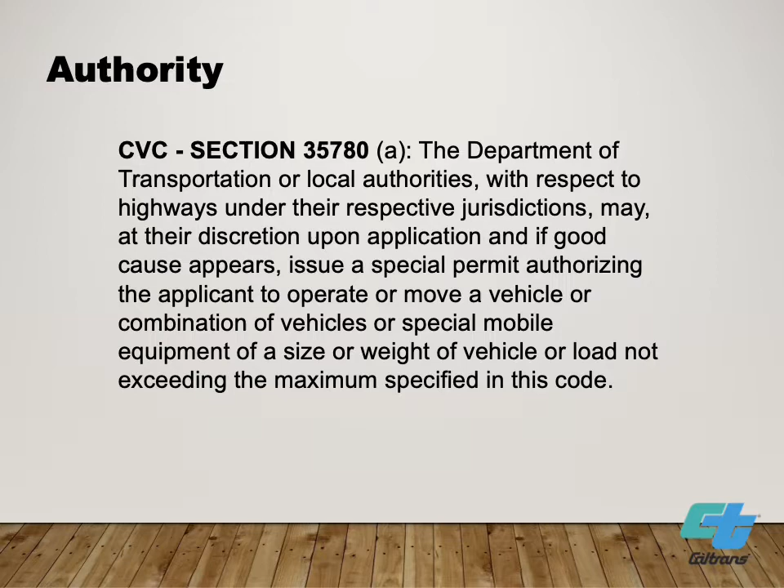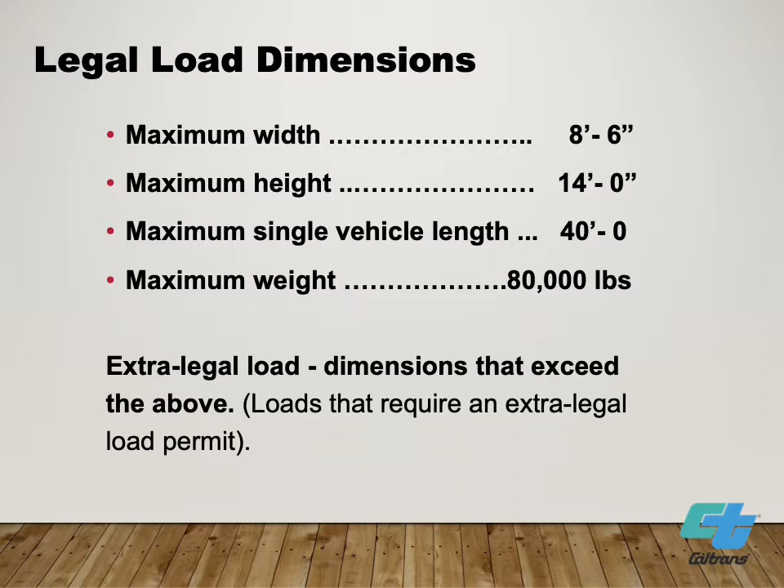To understand what is considered an oversized overweight permit load, we need to know legal dimensions. Legal vehicles are a maximum width of 8.5 feet, maximum height of 14 feet, maximum single vehicle length of 40 feet, and a maximum weight of 80,000 pounds. Any vehicles or loads beyond the legal dimensions or heavier than 80,000 pounds are considered to be oversized or overweight and require a transportation permit to travel on the state highway system.

Here are some examples of permit loads. Here is a 9-axle trailer with a Cat Scraper 657E. This is considered an oversized and overweight permit load.

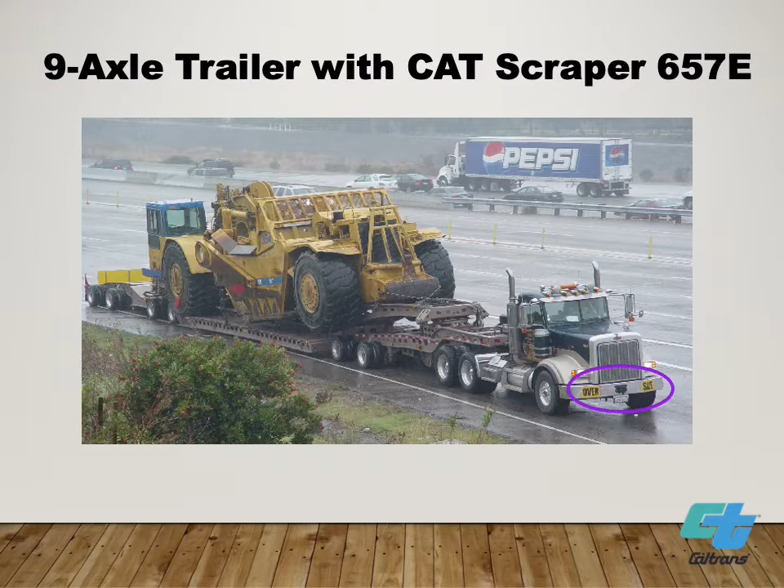Here is a windmill blade that can reach lengths of up to 150 feet long.

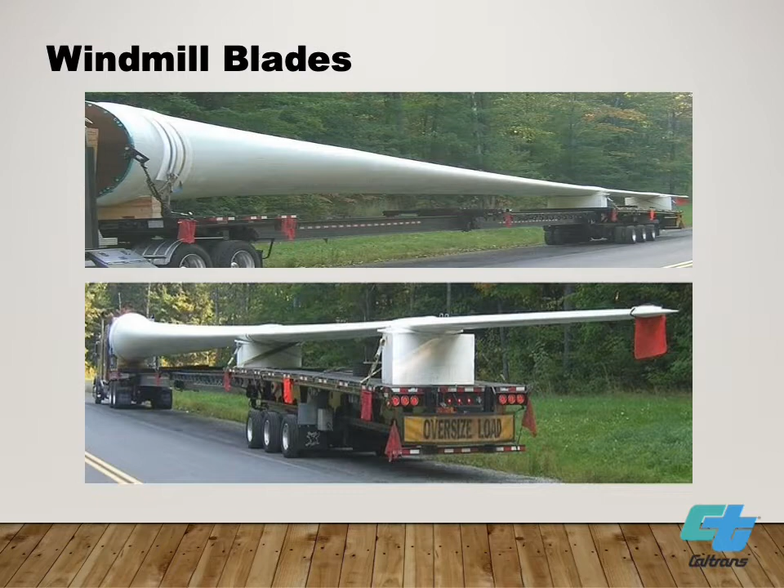Here is a refinery tank, which was an oversized and overweight permit. Sometimes a permit load requires the removal or resetting of traffic lights and electrical poles while moving the load.

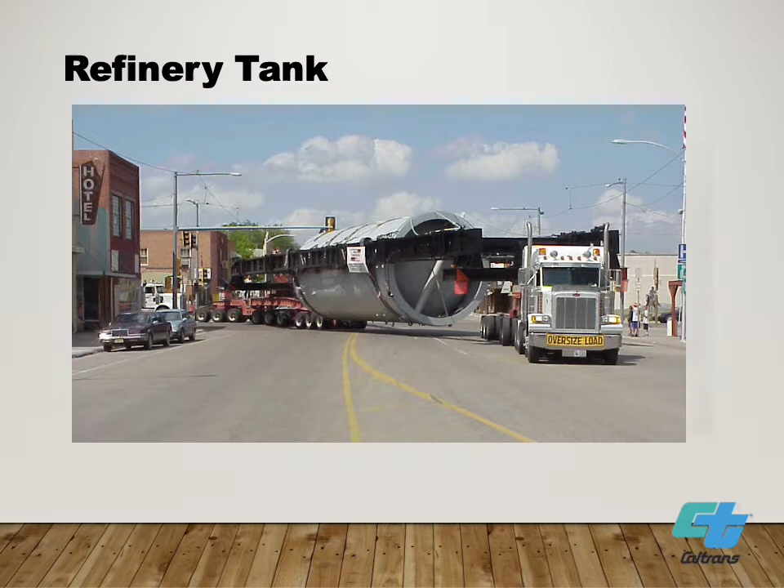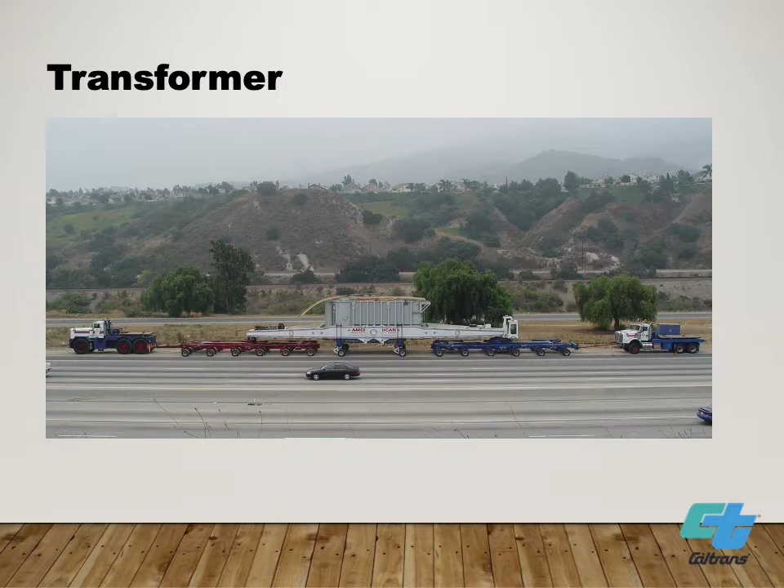Lastly, here's a transformer. Since it was too heavy, it was hauled on dual-lane steerable trailers to distribute the load on each axle and to avoid damage on roadway pavement.

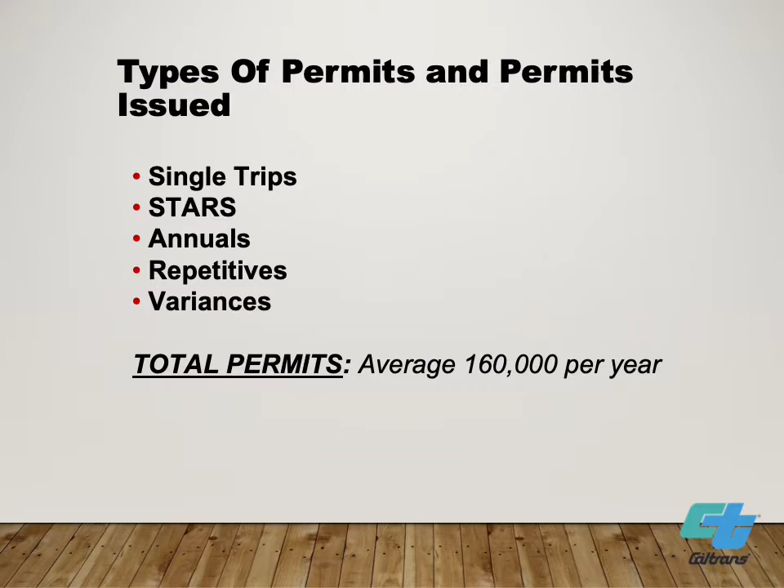These are all the types of permits our office is authorized to issue: single trips, STARS, annuals, repetitives, and variances. The Transportation Permits Office averages about 160,000 permits per year.

A single trip or STARS permit is a permit issued for an oversized overweight permit load that is good for one-time, one-way travel from point A to point B. The only difference between the two is that single trips have to be faxed in, while STARS can be processed online using our STARS program.

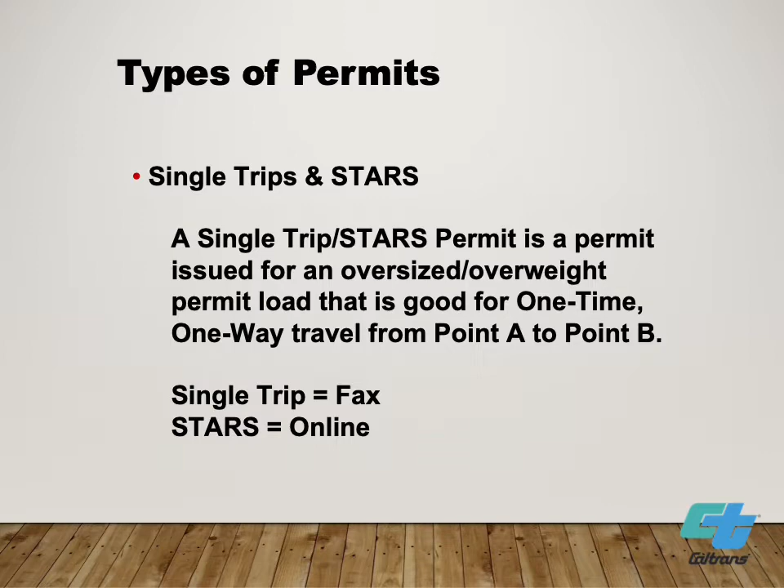An annual permit is a permit issued for a qualifying vehicle or load that is valid for 1 calendar year and limited to legal height, a max width of 12 feet, and is allowed to have extra legal weight. Being that they are only allowed certain dimensions, they are allowed to travel throughout the state based off of a map they are given on highways that can accommodate them safely.

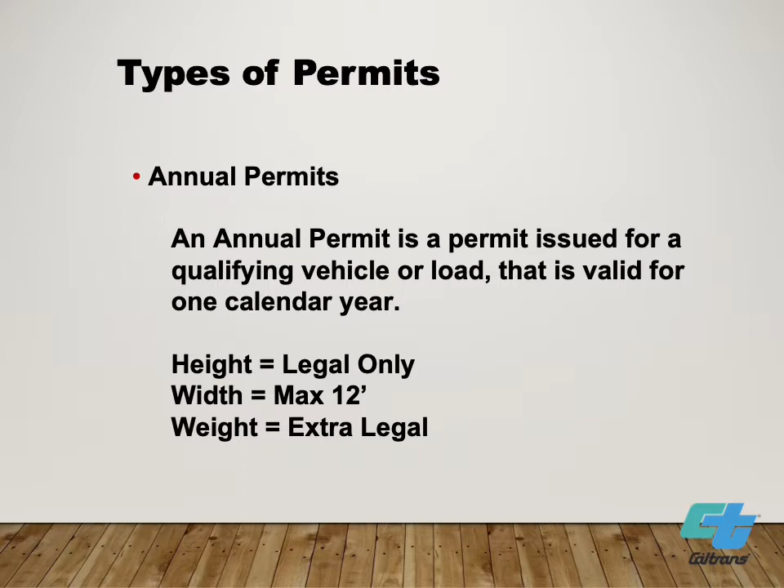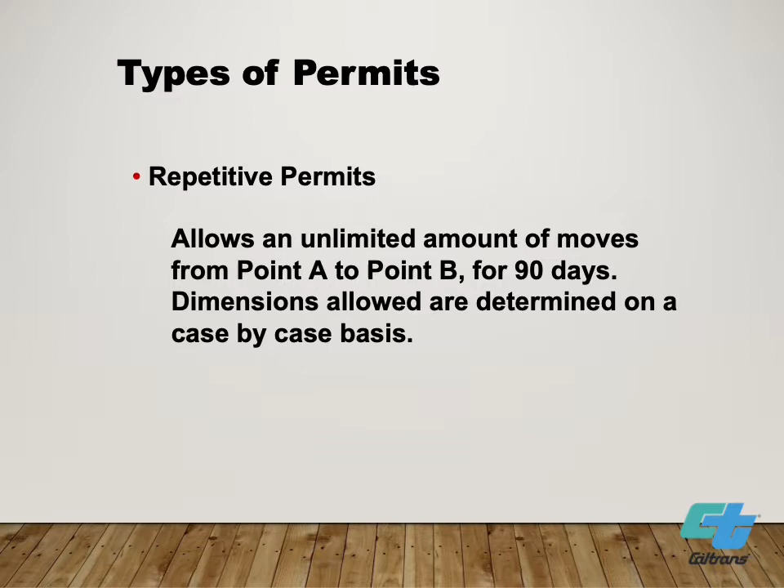A repetitive permit is a permit issued that allows an unlimited amount of moves from point A to point B for 90 days. Unlike an annual permit, dimensions allowed are determined on a case-by-case basis.

Lastly, there are variance permits. These are for large loads taller than 17 feet tall, wider than 16 feet wide, and or longer than 125 feet. This permit type may require CHP to safely escort the load and may require the route to be surveyed by a third party before the permit can be issued.

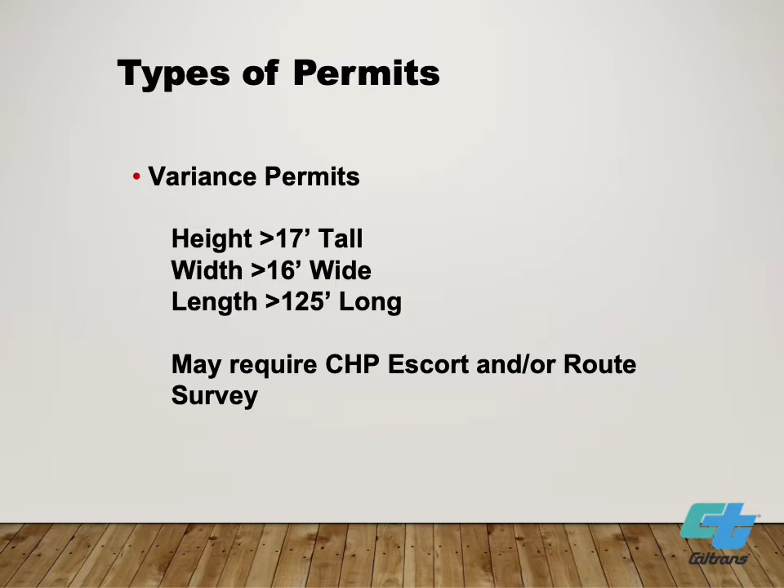When we issue any permit that is not an annual permit, we provide the specific route from point A to point B. Based on the size of the vehicle or load, we provide a safe and short route using our route clearing database to try and avoid any construction or restrictions on the state highway system.

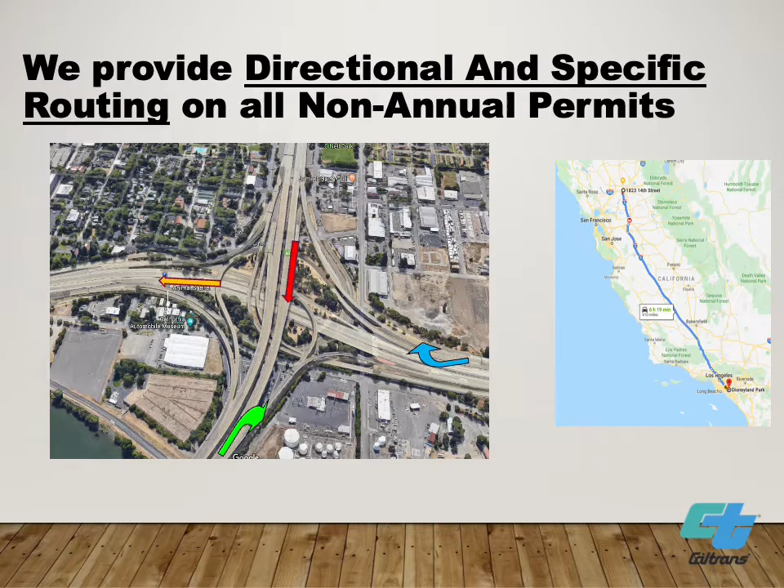Since these routes have been checked to ensure they can accommodate the oversized loads, haulers are not allowed to deviate from their given route, nor take a detour not listed on their transportation permit.

Here is an example of a single trip permit. When we issue a permit, the information can be valid up to 10 days from the date of issue. Since the permits are issued based on conditions at the time of issuance and are valid up to 10 days, these oversized and overweight loads must be allowed to travel through or clear through construction areas prior to any new installation of restrictions.

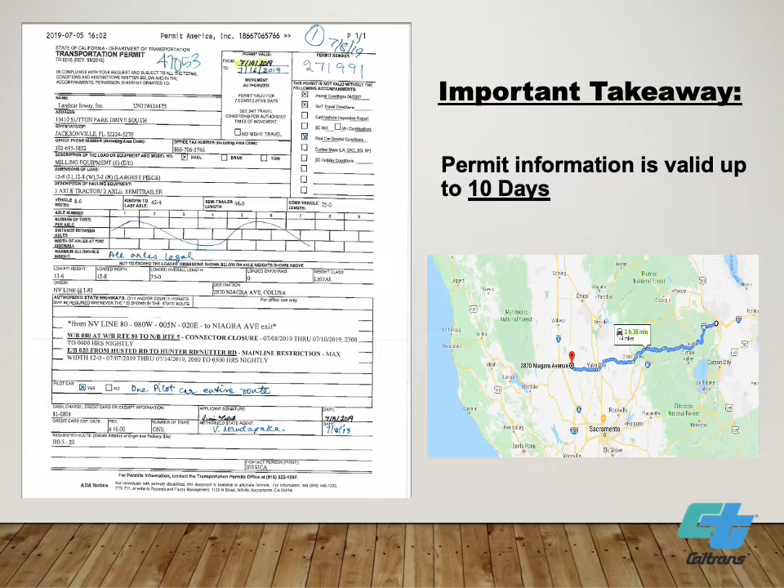If we take a look at the route on this permit, you can see that the route includes the location, date, and times of closures or restrictions that they will encounter on their route. This gives the hauler an opportunity to avoid traveling at those times. These are generated based off of the information you submit.

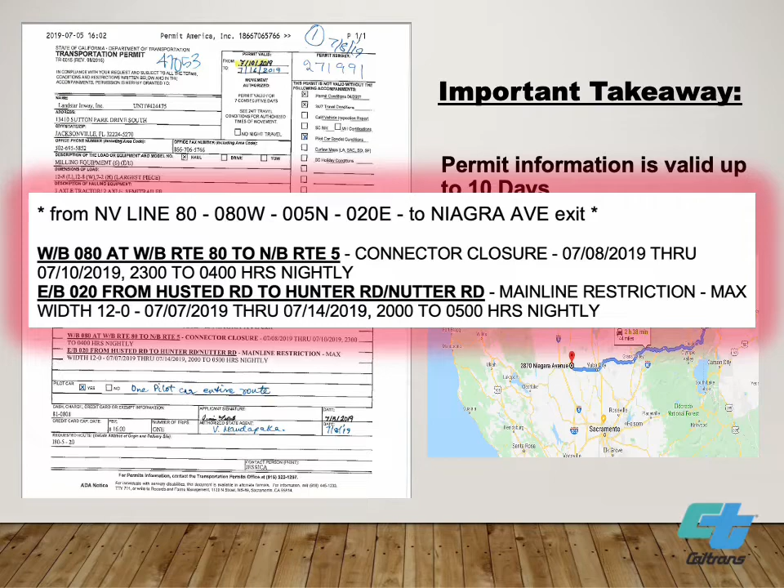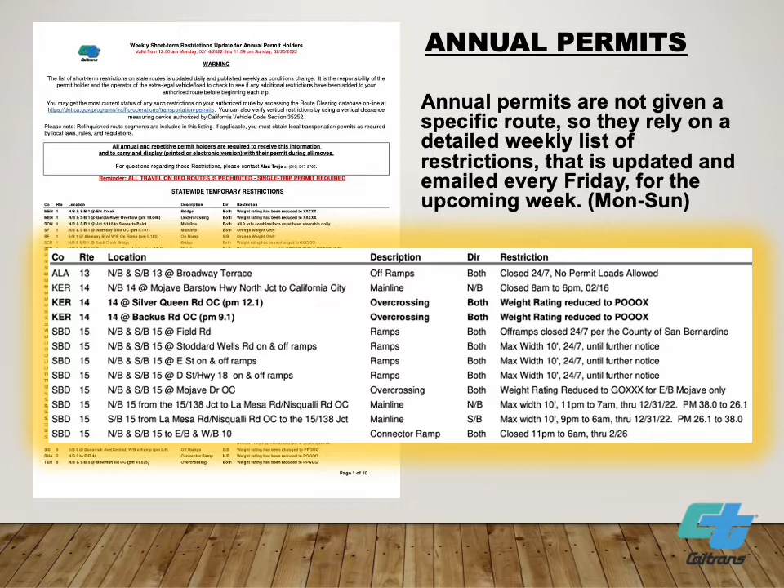Annual permits, on the other hand, are not given a specific route, and since they only receive a permit once a year, they rely on a detailed weekly list of restrictions that is updated and emailed to them every Friday for the upcoming week. This list is compiled using the information we receive from you as well.

According to the department's construction manual, section 4-1203C 1A, the RE is required to confirm that the contractor submits a scheduled closure in advance as outlined in the standard specifications, and that the RE must inform the transportation permits unit at least 15 days in advance of the closure. Any construction restrictions will impact the movement of permit loads on the state highway.

This is why we need to know all the construction restrictions in advance in order to update our database before we issue out any permits to our customers.

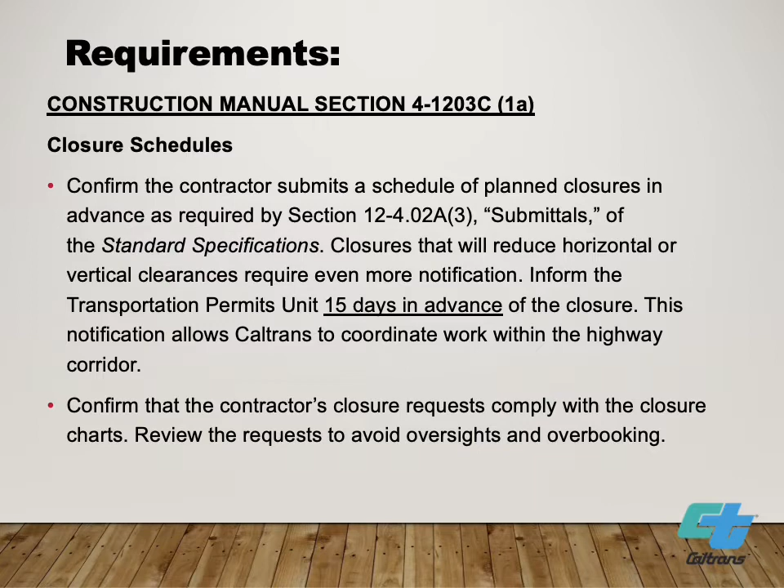In order to accomplish this, all closures must be submitted at least 15 days in advance through LCS. In addition to submitting the closure into LCS, a notice of change in clearance form will need to be submitted for the following closure types.

1. Any reduction of horizontal clearances of travelways, including shoulders, to 2 lanes or fewer during construction. This can include construction activities such as temporary barrier placement, paving, and one-way traffic control.

2. Any reduction on vertical clearances of travelways, including shoulders, during construction. It could be activities such as pavement overlays, overhead sign installation, or falsework girder erection. And 3. Any permanent changes in vertical or horizontal clearances.

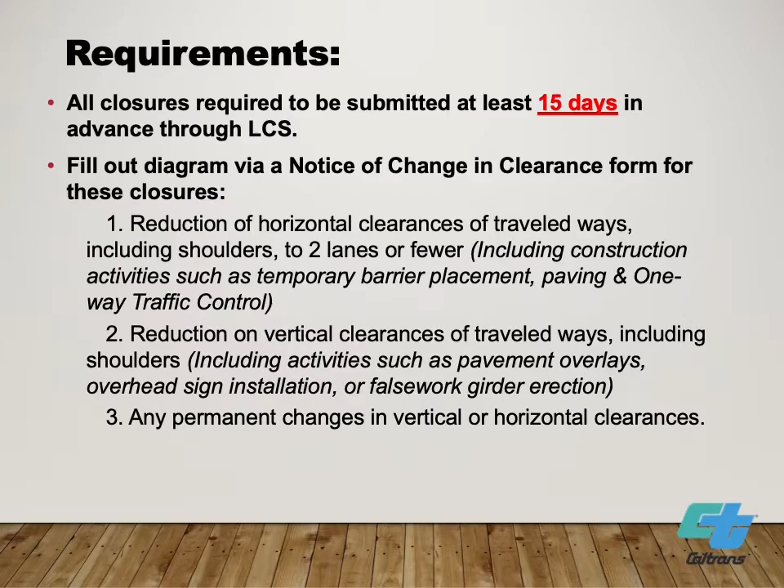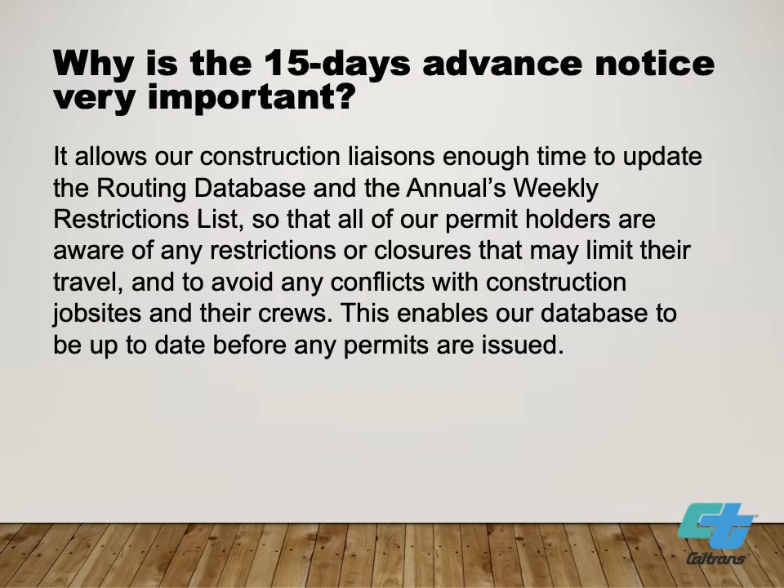Why is the 15 days advance notice very important? It allows our construction liaisons enough time to update the routing database and the annual's weekly restrictions list, so that all of our permit holders are aware of any restrictions or closures that may limit their travel, and to avoid any conflicts with construction job sites and their crews. This enables our database to be up to date before any permits are issued.

In the situation where a closure request is submitted by the contractor, the resident engineer is required to accept the submittal in the lane closure system. Otherwise, the closure will not post and be visible in the LCS, and the HQ construction liaison staff will not see the closure request.

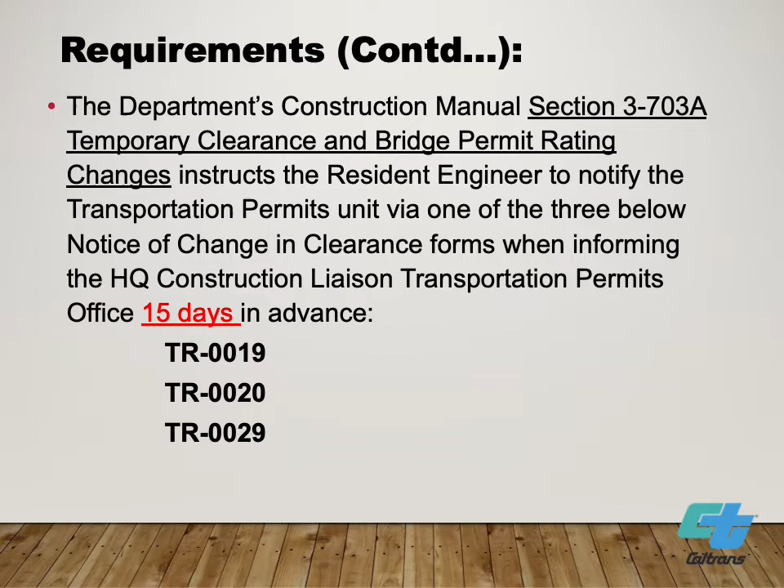When the resident engineer is required to notify HQ Transportation Permits Office of any changes in vertical or horizontal clearances with a clearance diagram, the RE will need to fill out one of the 3 Notice of Change in Clearance forms: TR-0019, TR-0020, or TR-0029 for every closure. According to the Construction Manual Section 3-703A, this must be done at least 15 days in advance of the change.

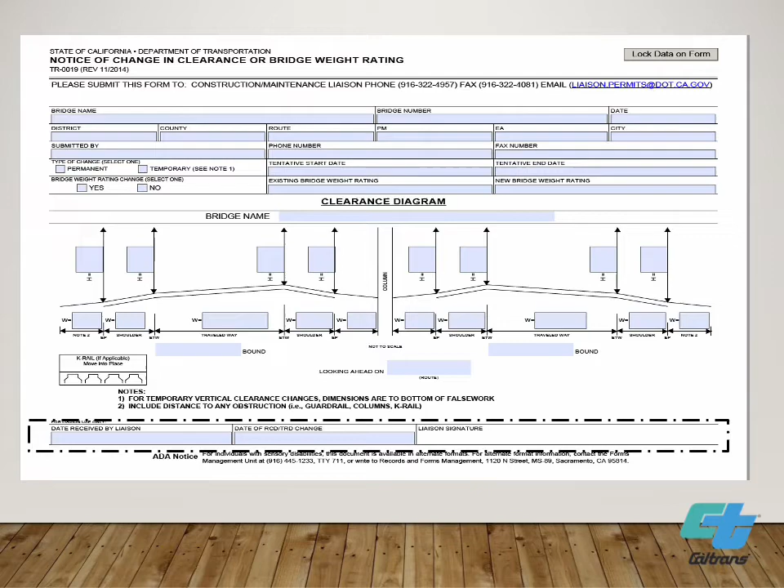Here is Form TR-0019. This form is used for divided highways, where there is a separation between both directions of the highway. The RE will need to fill out all the required information at the top of the form, including the tentative start and end date of the clearance change. The bottom portion of the form must include all the required measurements, listed in feet and inches. If K-rail barrier is being placed, please draw in the location of the K-rail. Measurements between K-rails should be measured from the inside face of the barrier.

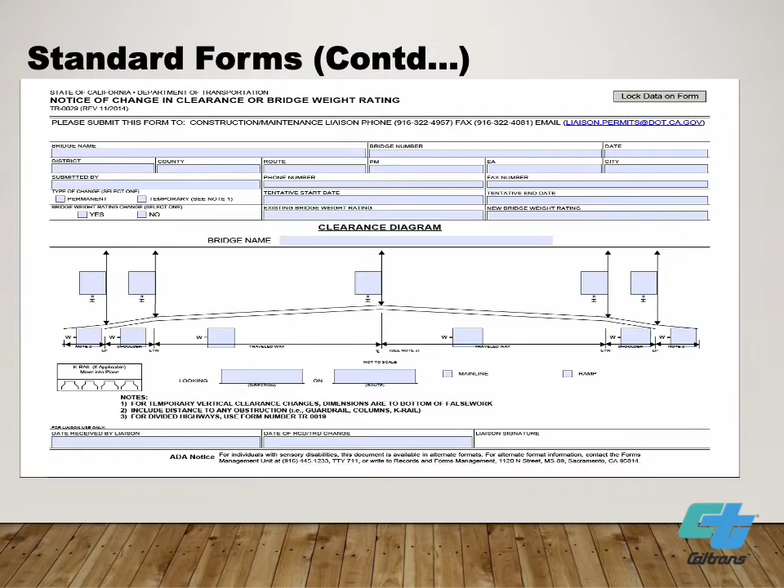The next form is TR-0029. This form is similar to Form TR-0019, but is used for undivided highways. This form can also be used for on and off ramps as well.

This third form is TR-0020, and this form is used for overhead signs. Although this form looks like it is for a single post type sign, you can use it for two post signs as well. Just be sure to include that information in the sign name portion of the form.

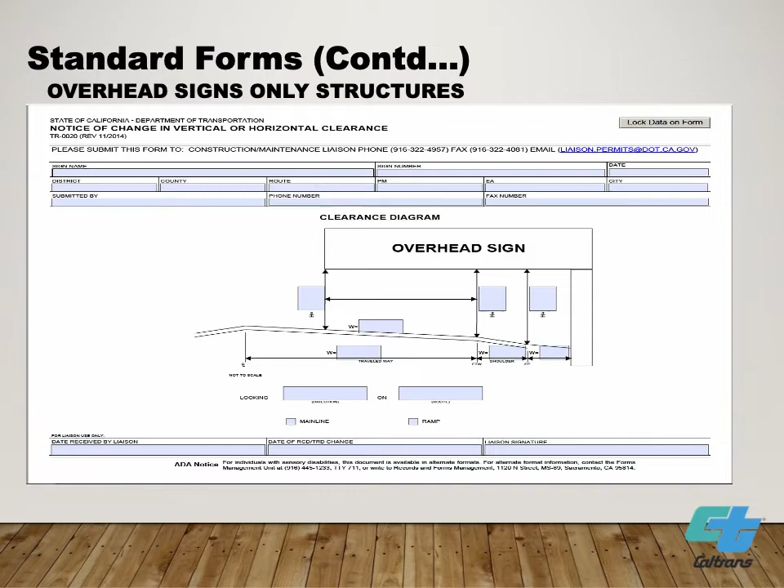After you have completed your change in clearance form, please send a copy to our construction liaison staff at liaison.permits@dot.ca.gov. Our construction liaison staff will verify the form and sign it before sending it back to you for your records.

Delays and time extensions: If the vertical or horizontal clearances are not reported on time, meaning the RE has not notified us at least 15 days in advance, please contact the construction liaison and inform them as soon as possible to discuss options on how to implement a potential solution. It could be installation of an advance sign to notify changes to permit drivers, or to accommodate them through the construction area. If a closure needs to be extended beyond the initially provided end date, it is considered a new closure and will need to be provided to our office with 15 days advance notice.

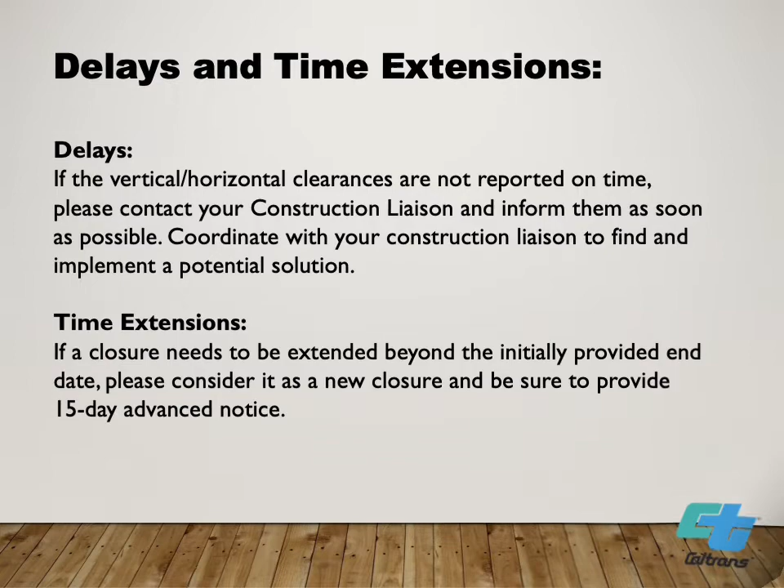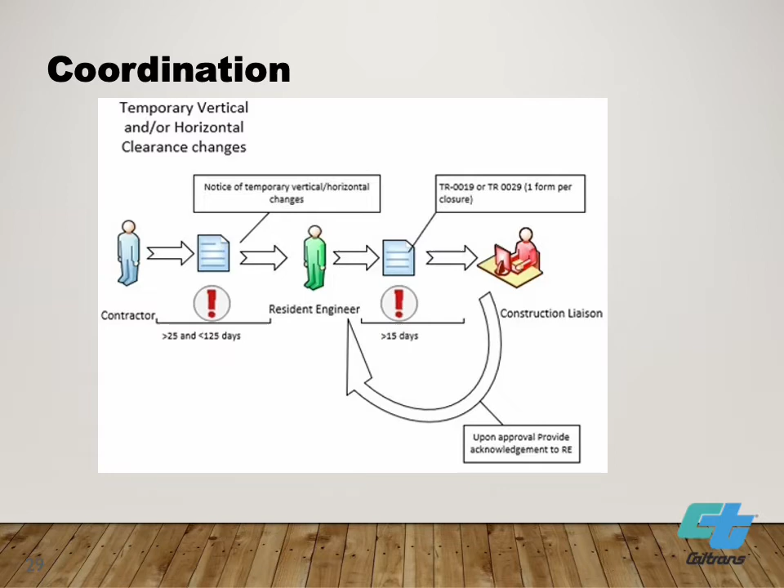Here is a flow of coordination between the contractor, resident engineer, and construction liaison. If there are any temporary vertical or horizontal clearance changes during construction, the contractor will need to notify the resident engineer in advance, anywhere between 25 to 125 days. Then the RE will notify the construction liaison at least 15 days in advance via Form TR-0019 or TR-0029. The construction liaison will review the form, sign it, and then send an approval copy back to the RE for their records.

For permanent vertical or horizontal clearance changes, such as when a job has been completed, the RE must also notify the construction liaison 15 days in advance.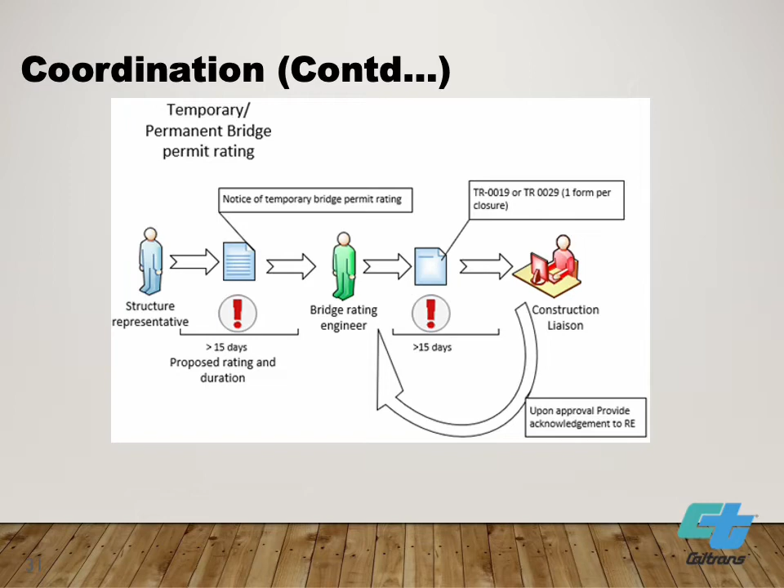For temporary or permanent bridge permit rating, a structure representative will notify the bridge rating engineer, and the bridge rating engineer will notify our construction liaison via Form TR-0019 or TR-0029 at least 15 days in advance. The construction liaison will review and approve the form and send a signed copy back to the RE for their records.

For rescinding temporary bridge permit rating, the structure representative notifies the bridge rating engineer, and the bridge rating engineer notifies our construction liaison less than 3 days in advance.

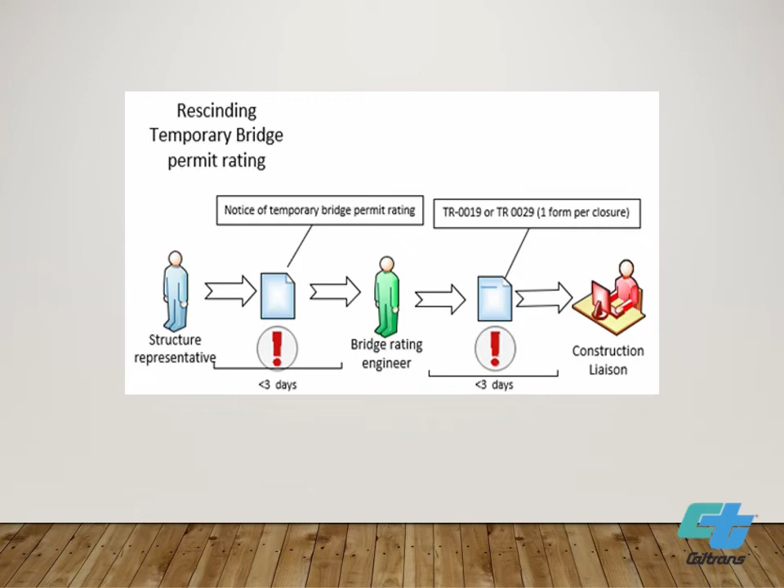As mentioned earlier, the 15 days advance notice is very important to keep truck permit movement safely on our highways. What if the 15 days advance notification requirement is not met? A permit can be issued with a route through a closure or an area with reduced clearance that they are not aware of, and permit loads could...

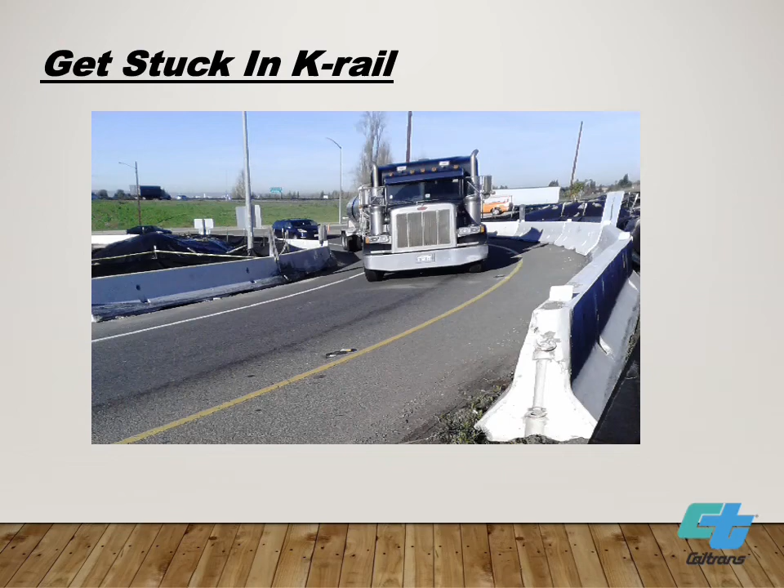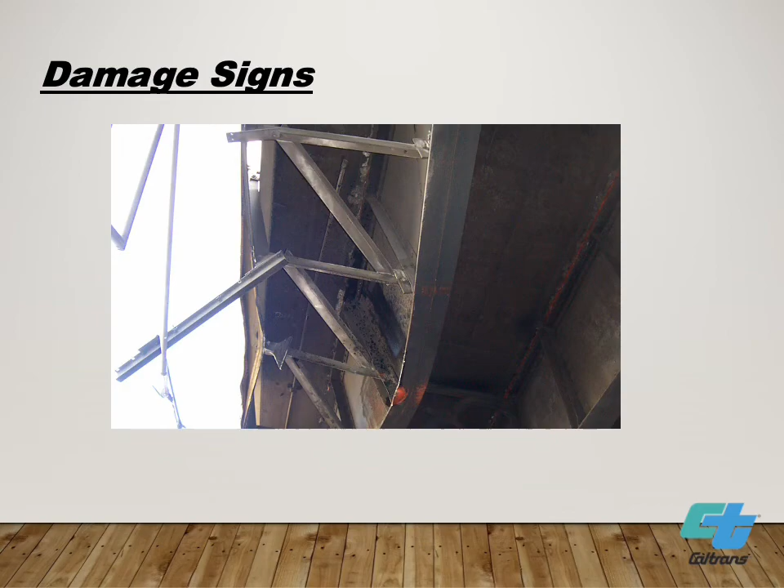...get stuck in K-rail, hit structures, damage overhead signs, damage falsework, overload, and damage bridges.

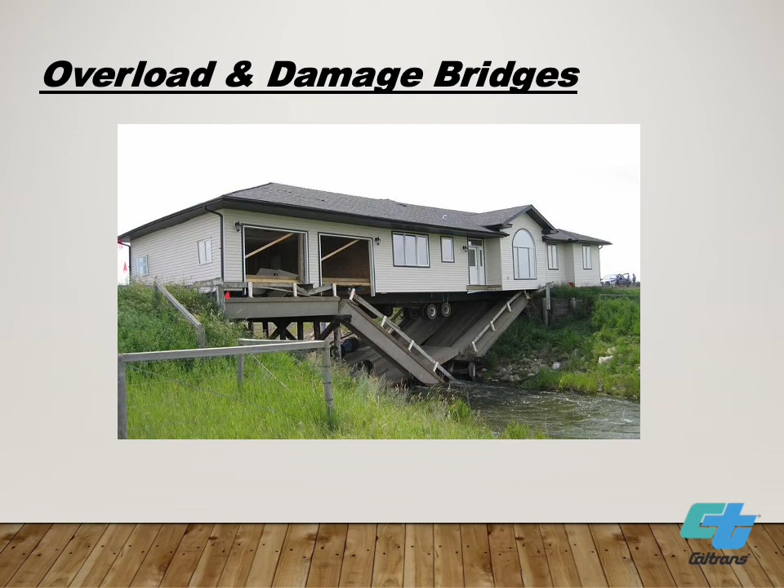If you have any questions about filling out and submitting a change of clearance diagram, or any other general questions regarding submitting closures to our construction liaisons, our construction liaison staff can be reached via phone or by email at liaison.permits@dot.ca.gov, or you can visit the construction liaison homepage for more information by going to dot.ca.gov/programs/traffic-operations/transportation-permits/liaisons.